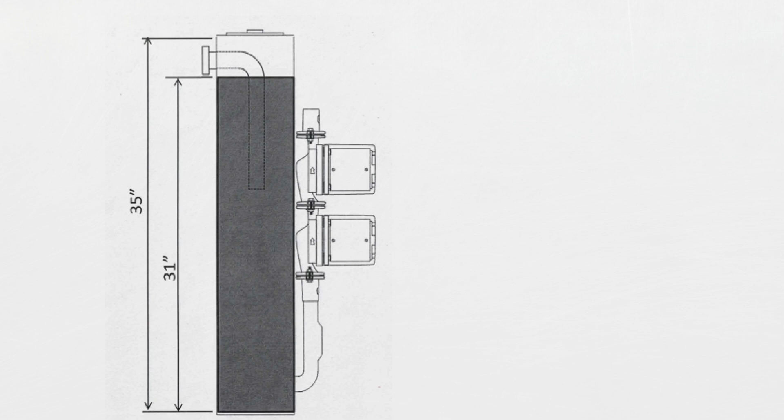The EA non-pressurized flow center pumping stations operate on the concept of static pressure. Static pressure is created by a constant column of fluid in the canister of the flow center. This column of water creates 0.042 psi per inch of fluid.

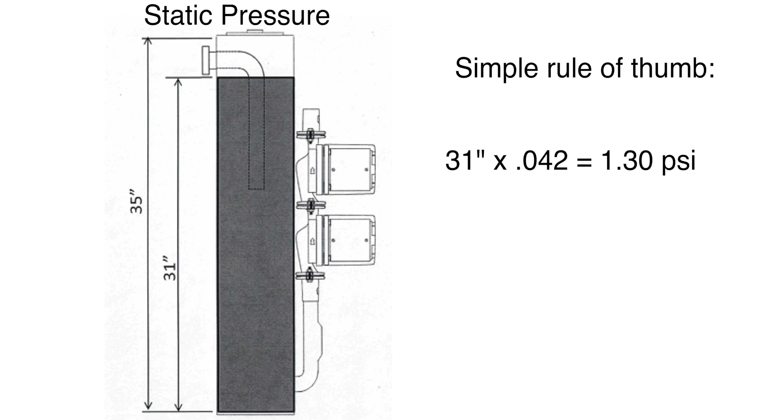The flow centers maintain approximately 1.30 psi, which is well above the static pressure requirement for all inline wet rotor pumps, to move the fluid in the canister at a constant rate of flow, or GPM, throughout the geothermal system. The fluid level is always above the pumps, creating fluid suction, which prevents pump cavitation.

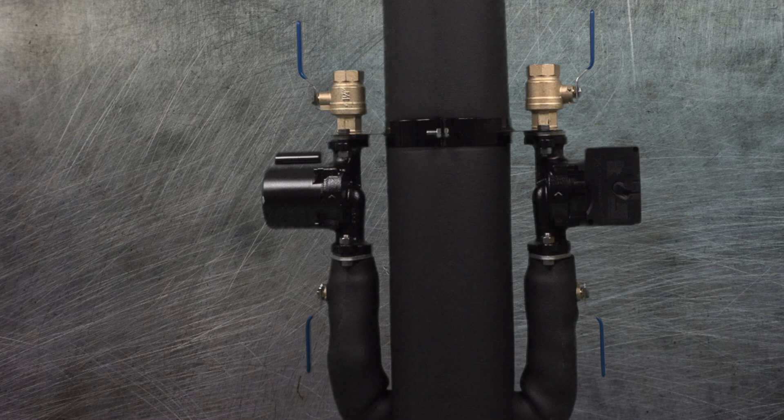The EA Flow Center is reliable and attractive with its long-lasting heavy-duty design, allowing it to fit seamlessly into all utility rooms. The flow center should be mounted on the floor.

The 2-year warranty of the flow center provides our customers with peace of mind that we stand behind our product. Wet rotor pumps specifically designed for the industry are reliable and warranted for 2 years.

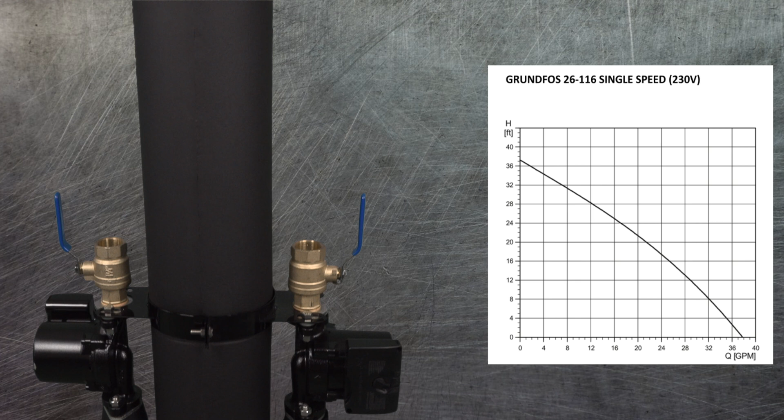Pump size is determined by calculating the feet of head and GPM of each system. Please refer to the installation guide on our website for pump curve information and pump options.

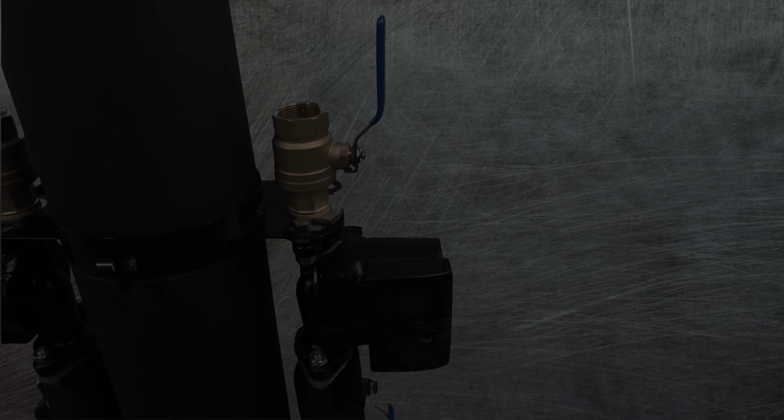The EA Flow Center arrives as one complete unit, so installation is simple and efficient. The EA has 2 separate pumping circuits designed to work with 2 heat pumps on 1 common loop field. Each circuit can handle up to 6 tons with up to 2 pumps on each circuit using normal piping and installation practices.

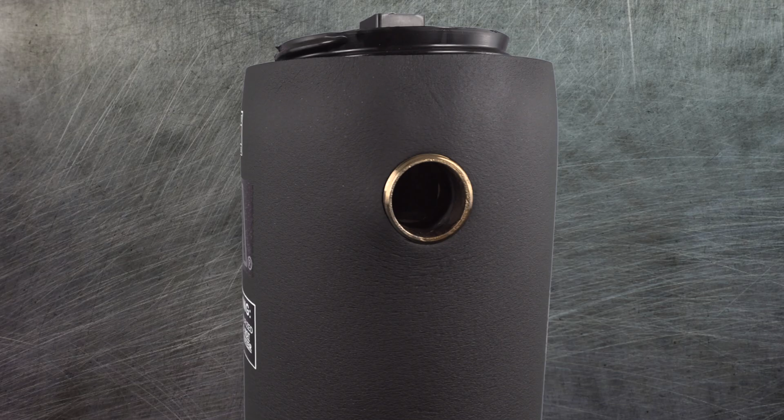Simply connect the return line from the earth loop to the flow center and then connect a supply line from the flow center to the heat pumps. The EA comes with our 1 1/4 inch brass male pipe thread connection. The outlet connections are 1 1/4 inch female pipe thread ball valve connections.

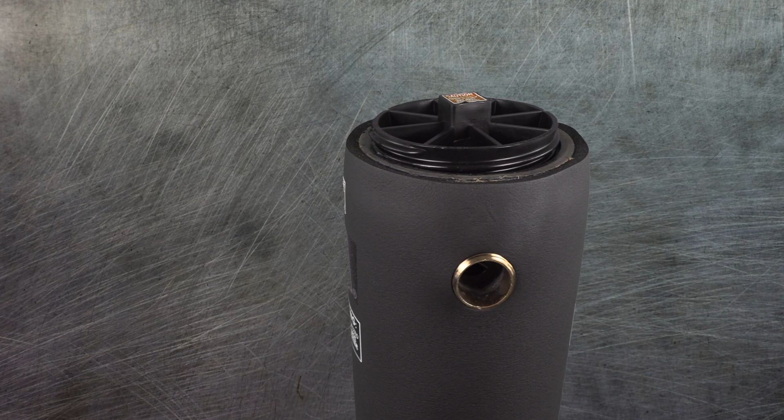The EA Flow Center is easy to operate and maintain. The self-sealing cap protects the system from dirt and debris. Simply remove the hand-tightened cap to easily add and check antifreeze and flow.

The top and bottom ball valves allow for easy pump servicing while the system is still in operation should any pump need to be replaced.